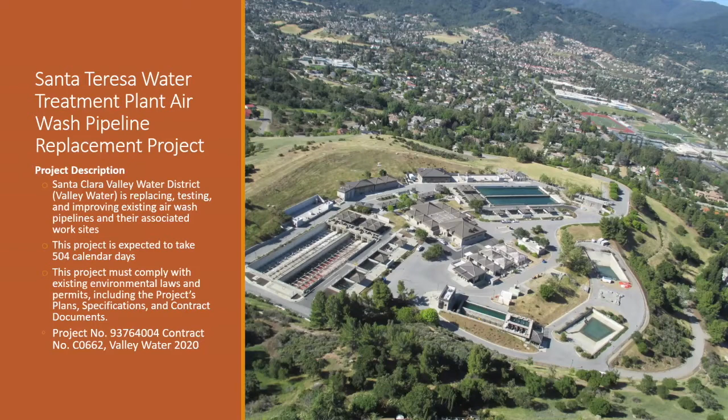The contractor shall comply with all applicable federal and state laws, rules, and regulations related to the protection of migratory birds, including, but not necessarily limited to, the Federal Migratory Bird Treaty Act and the California Department of Fish and Game Code. The contractor shall coordinate several measures, including awareness and training of the contractor's personnel on which bird species are protected, their nesting seasons, and seasonal variability.

Surveys to determine the presence of nesting birds in the project area, establishment, maintenance, and removal of protective buffer zones around nests, installation and maintenance of exclusion devices, nest prevention activities, and finally, monitoring to ensure the adequacy of the compliance measures.

Federal, state, and local laws, as well as Valley Water policies, provide for the protection of wildlife and natural resources. Some laws include substantial fines and penalties. This training will review some of the general laws which the project will operate under.

First, the Migratory Bird Treaty Act, administered by the U.S. Fish and Wildlife Service, regulates migratory birds and their nests. The full text is pasted here. This law states that we must not disturb native migratory birds, their nests, or their eggs.

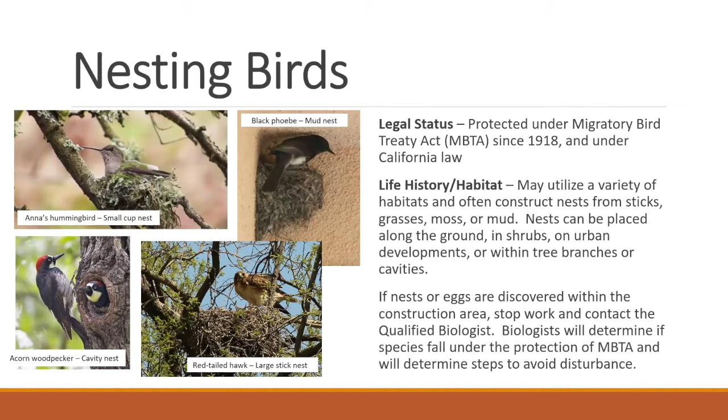Birds may nest inside staged equipment or on structures. If a protected species has an active nest on the project site, it cannot be removed per the Migratory Bird Treaty Act, and it may lead to delays in work. Good housekeeping paired with regular biological surveys can help us prevent nests from becoming established on equipment.

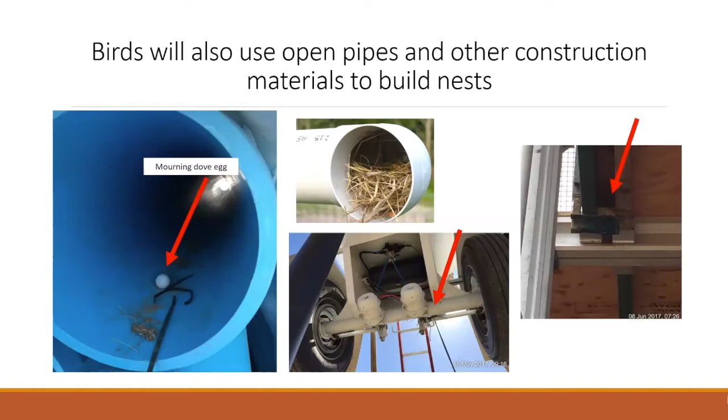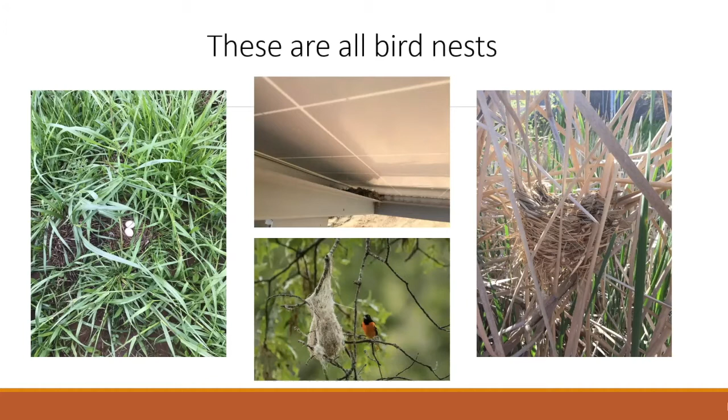The California Fish and Game Code also prohibits the disturbance of any native migratory nests, birds, or their eggs. During the period between January 15th and August 31st, we may expect protected birds to nest within suitable habitat in the project area.

There is variability in the nesting season. For example, Anna's hummingbirds may nest into September. Annual variation in climate or extreme events, such as fires, may alter the nesting season.

Which birds are protected by the Migratory Bird Treaty Act? The answer is all birds native to the United States. This includes the vast majority of birds that you are likely to encounter on site. Although non-native species are not covered under the Migratory Bird Treaty Act, some native species closely resemble non-native species, such as rock pigeons. So don't disturb bird nests of any species.

If any nest or nesting behavior is observed, report it to your supervisor or the on-site biologist.

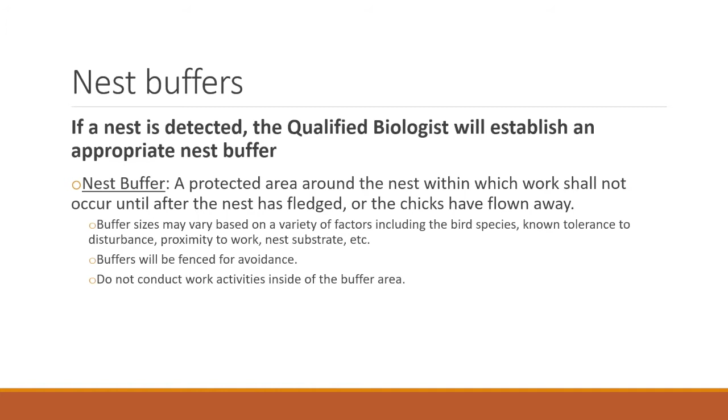When a nest is found on site, first stop all activities which may harm the nest. Next, contact the engineer immediately. Only the qualified biologist should approach the nest, and only when it is necessary to do so.

The biologist shall inform the crew of the nest status, whether it is active or not, and describe steps to avoid impacts. This may include establishment of a nest buffer.

Until inspected by the engineer or the qualified biologist, the crew shall establish a temporary buffer zone around any newly located nests.

If the engineer or qualified biologist are not available, the crew shall establish a protective buffer zone until they are able to assess the situation.

If the nest is found on the ground and it is not a raptor, like a hawk, a 20-foot radius protective buffer zone shall be established. If the nest is on shrubs, trees, structures, or equipment, a 50-foot radius protective buffer zone shall be established.

If it is a raptor, heron, or eagle nest, a 250-foot buffer shall be established. The term raptor includes hawks, owls, burrowing owls, falcons, and eagles. Upon review, the qualified biologist may recommend modifications to the buffer zones.

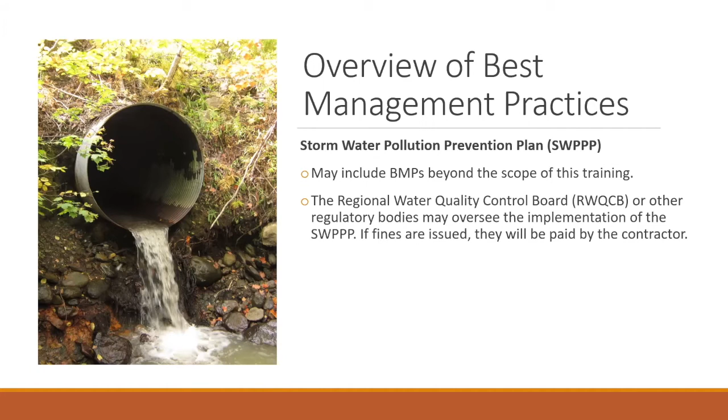The Regional Water Quality Control Board or other regulatory bodies may oversee the implementation of the SWPPP. If fines are issued, they will be paid by the contractor.

The contractor shall meet all applicable regulatory requirements to ensure that any discharges to surface waters will not cause violation to the state water quality standards or violation of regulatory permits issued by regulatory agencies.

The contractor shall prevent water quality degradation of water bodies and/or of storm drains.

Water quality is measured in terms of pollution substances, turbidity, dissolved oxygen, pH, and temperature.

Oily, greasy, or sediment-laden substances or other materials that originate from the contractor's operation shall not be allowed to enter or be placed where they may later enter any reservoir, river, creek, or stream.

The contractor shall comply with the requirements of applicable permits. The contractor shall implement any additional water quality best management practices and mitigation measures described in these specifications.

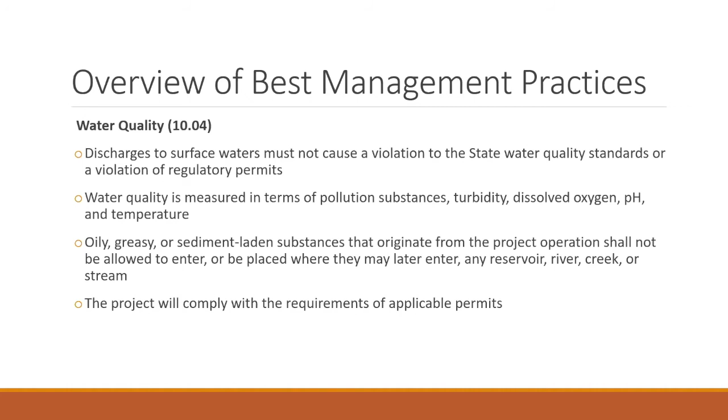Cultural resources. Potential burial sites should not be disturbed by active work.

If a burial site is unearthed, work shall be immediately stopped and the county coroner and engineer shall be contacted immediately. The contractor shall secure the site and protect human remains from further disturbance.

If a potential artifact is discovered, work shall halt within 30 feet of the find and contact an archaeologist for identification and further evaluation.

Air compressors and internal combustion engines shall be in good operating condition that meets or exceeds original factory specs, and shall be equipped with high-grade mufflers, air inlet silencers where appropriate, and noise suppressors.

All mobile or fixed noise-producing machinery and equipment, including package equipment such as fans, cranes, arc welders, air compressors, etc., shall be suitably housed, enclosed, shielded, and equipped with noise control features or muffled to meet the noise limits specified in the special provisions. All mobile or fixed noise-producing equipment used by the contractor that is regulated for noise output by federal, state, or local law shall comply with this regulation while in use. This shall include vehicles licensed for use on public highways.

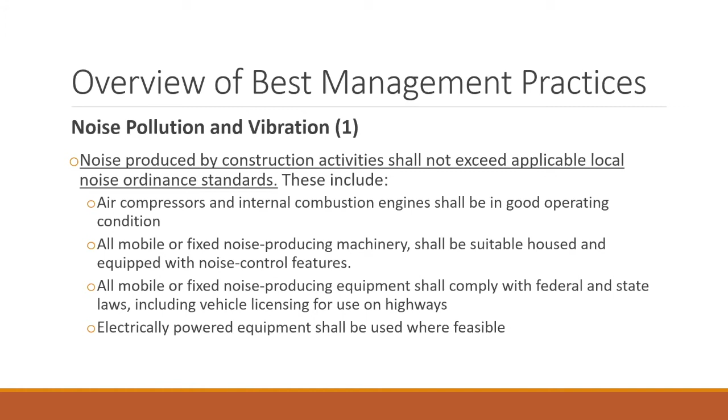The use of noise-producing signals, including horns, whistles, alarms, and bells, shall be for safety warning and emergency purposes only. No music system, including personal or vehicle radio, tape, CD players, or the like, shall be audible at the project right-of-way line.

Trucks or other mobile equipment shall not use engine decompression, also known as jake brakes, for deceleration on grades where feasible.

The contractor shall take all necessary precautions during its operations to limit peak particle velocities from vibratory compaction or percussion equipment so that they do not become a public nuisance or result in property damage. Any equipment causing non-compliance with the noise or vibration criteria shall be removed from the job site as directed by the engineer.

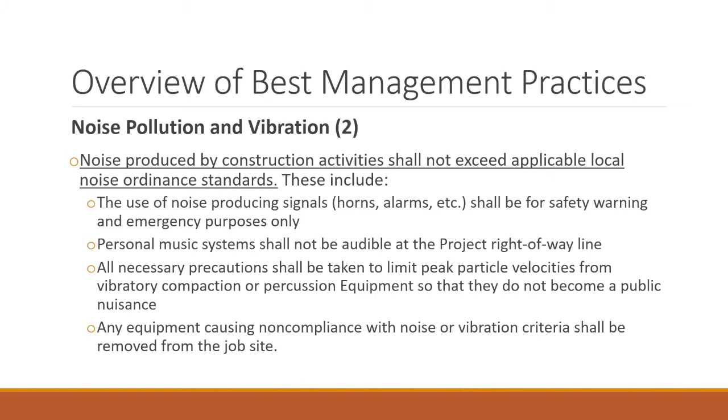The contractor shall comply with all applicable requirements of the applicable air quality management or control district and California Air Resources Board regulations. Idling of internal combustion engines shall be held to an absolute minimum. All vehicles with internal combustion engines shall be fitted with spark arresters.

The contractor shall not use any of the listed materials banned by BAAQMD Regulation 8, Rule 15. Serpentine materials that have average asbestos content greater than 5% may not be used for surfacing.

Except as provided by law, idling of heavy-duty diesel trucks with gross vehicular weight ratings greater than 10,000 pounds shall be no more than 5 minutes, as per California Code of Regulations, Title 13, Section 2485. The contractor shall implement any additional air quality best management practices and mitigation measures described in these specifications.

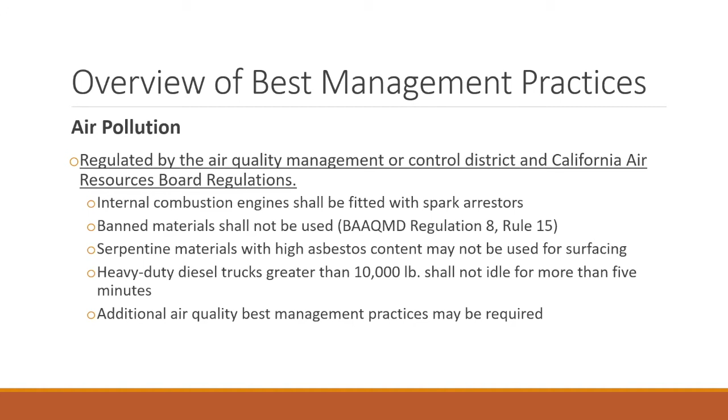Care shall be taken to prevent spillage when hauling is done. Spillage resulting from hauling operations along or across any public traveled way shall be removed immediately by the contractor, who is responsible for all expenses for removal of spillage.

The contractor shall control dust nuisances originating from the contractor's operations, either inside or outside of the right-of-way, and shall provide all necessary precautionary measures to control dust and prevent spillage on public traveled ways. At a minimum, the contractor shall provide the measures listed below and shall also implement additional dust control BMPs and mitigation measures described in these specifications.

Active maintenance areas, unpaved access roads, and staging areas shall be kept sufficiently moist and watered as necessary, or shall be applied with non-toxic soil stabilizers to control dust generation.

Trucks hauling sediments and other loose materials shall be covered and shall maintain at least 6 inches of freeboard. Tailgates of trucks shall be sealed, and trucks shall be brushed down before leaving the site.

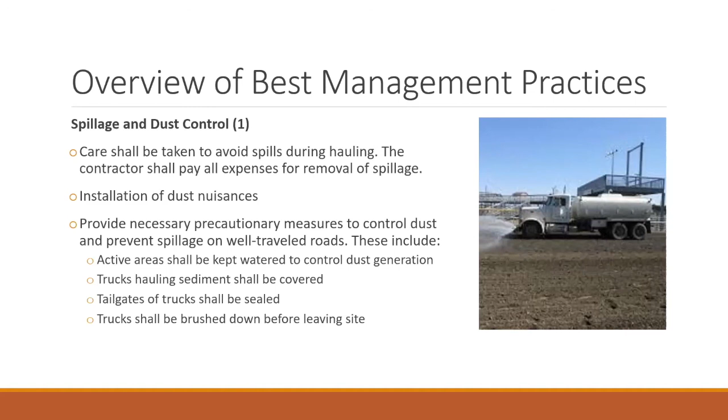Paved site access roads shall be swept using vacuum-powered street sweepers when visible soil material is carried onto the roadway. During high winds, the excavation and grading activities shall be watered, or the activity suspended if necessary, to control dust.

Inactive areas shall be sprayed with soil stabilizers or shall be seeded to avoid erosion or dust. Exposed stockpiles shall be watered, enclosed, covered, or sprayed with soil stabilizers.

Traffic speeds within the project right-of-way shall be limited to 15 miles per hour. For off-site restriction, comply with local agency requirements. Sandbags or other bank protections shall be installed to prevent silt runoff to roadways.

The contractor shall immediately remedy any spillage and dust nuisance or deficiency arising from or in consequence of the contractor's failure to perform the work. In other words, if a spill occurs, it shall be cleaned up immediately.

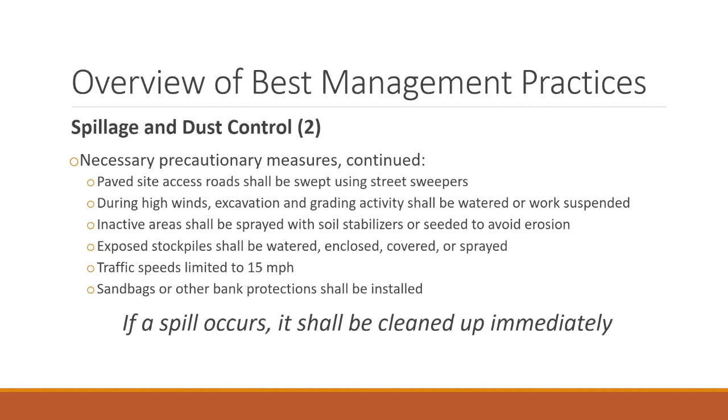The environmental training does not include all BMPs required during this project. Please refer to the project specifications for specific guidance related to the following topics.

Before beginning construction, all contractor construction personnel are required to attend an environmental training program. The training program will be completed in person or by watching a video at a district-designated location conducted by a qualified biologist provided by the district. Be sure to sign the sign-in sheet at the end of this training to assist in tracking.

The project contacts are Margaret Finch, Sequoia biologist and project manager, and Brett Hanshoe, Sequoia principal.